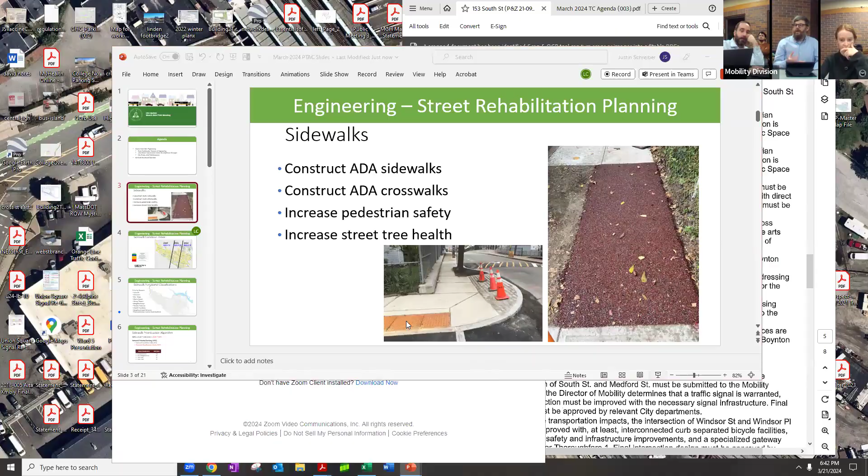We take those two components - the sidewalk condition index and the sidewalk classification priority - on the next slide.

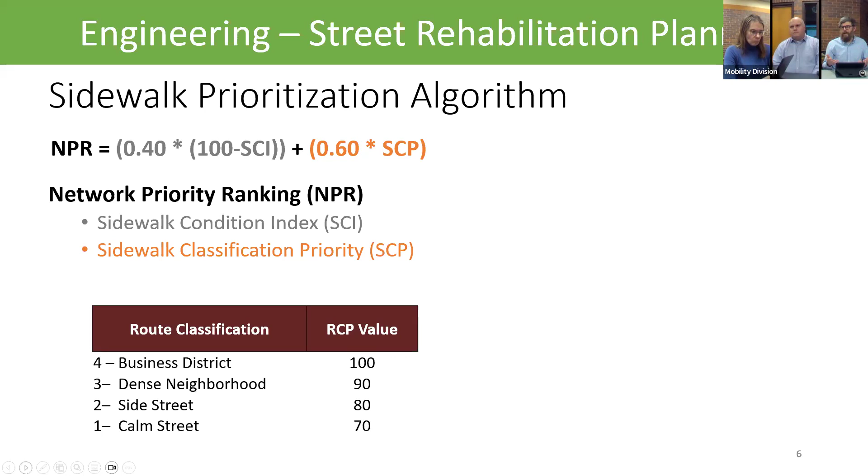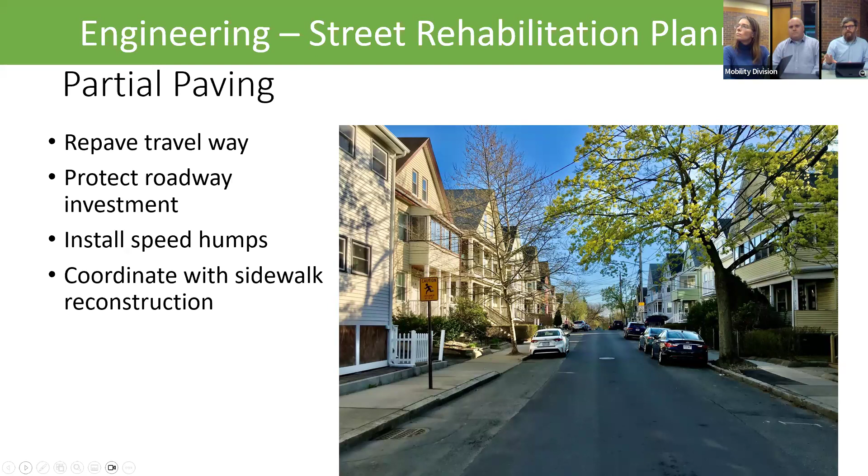We do the same thing on the next slide for partial paving, which is just paving the center roadway lane. For this one, we only worry about the condition of the pavement. The goal here is really to preserve the asset. So we do a similar analysis, much quicker, because it's just the condition index.

So now we have 3 different pieces that we're looking at, 3 really important aspects of our system. Each of them has a 5-year component, and we pull those together into construction contracts. One key thing we do is take the construction logistics of those and combine them.

So with partial paving and sidewalks, we're looking at the utility construction going on, both private utility construction and city work. We're trying to coordinate those things so we're not paving a sidewalk or roadway before going out to do utility work, whether it's natural gas, Eversource, or the city.

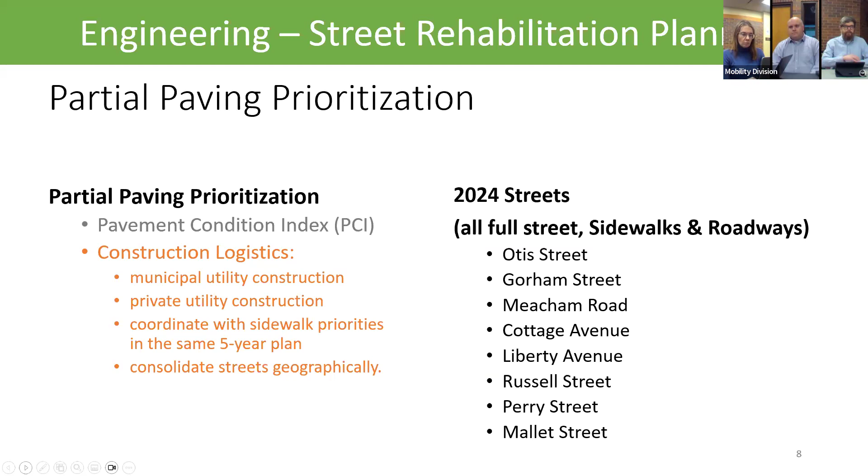Next page. This year, in lieu of doing a complete streets project like a corridor, frankly we have our hands full with a number of projects in design, namely Tufts and West Broadway for upcoming years, but also construction projects we're working on, namely West Washington. So we're boiling it down to something more manageable that fits our workflow better this year, and we're focusing on complete intersections.

We're doing this based on really good success over the past few years targeting intersections with our complete streets work. We know most safety issues occur when traffic intersects, whether vehicular, pedestrian, or transit. When traffic streams intersect, the likelihood of accidents and crashes increases, and those are areas where we've had really good success targeting infrastructure improvements. It's not the only thing we do, and not the most important thing we do, but it has been very successful. So we felt this year would be good to focus predominantly on them.

So now I'm going to jump - we could go through the individual ones, and actually, why don't I give a moment? I've been speaking really quickly. Let me give a moment for questions if anyone has any.

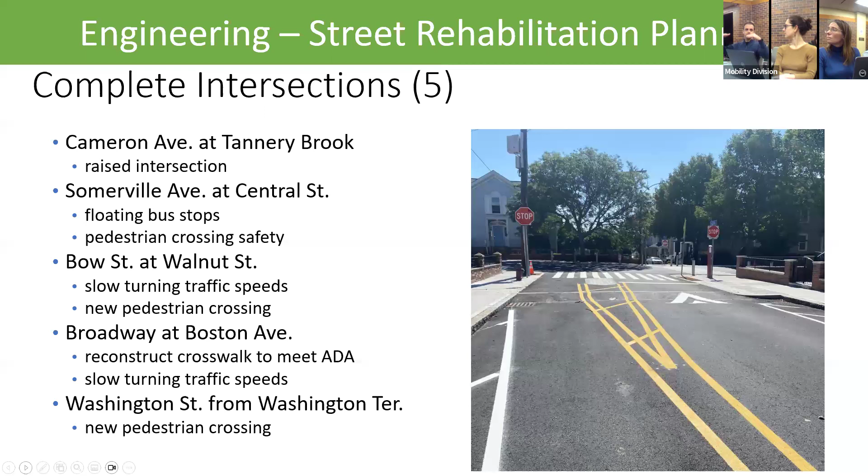Exciting. Do we have a goal — you showed the map with many of the colors that you laid out. Is there a minimum that we would like the city to be? Is it all green? Is it all blue? Is there a minimum? And if there is a minimum, is there a time scale that we can achieve that? How are we thinking about that far ahead?

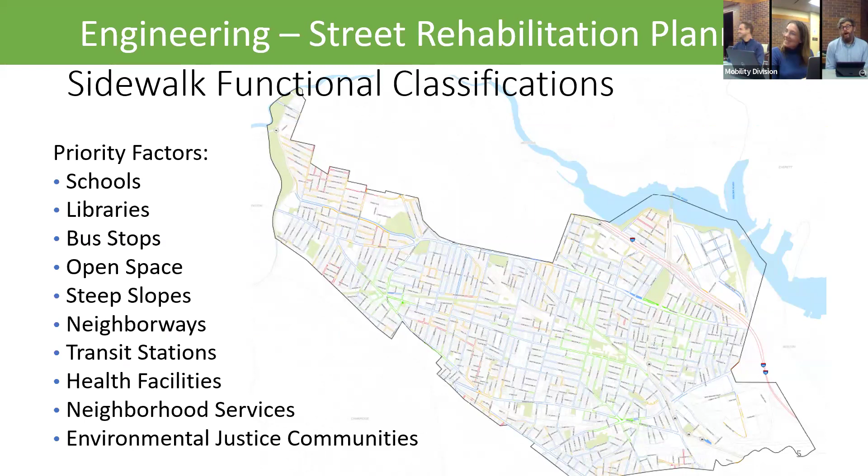That's a deep question. Go back one page earlier — actually, I think you're referring to the condition of the streets. I'm sorry, it was just one page earlier. The next page about the priority location, that shouldn't change every year until geography changes, until our uses change, and we wouldn't want that to all be green, because that would mean our entire city has no difference from one neighborhood to the next.

Ideally, this would all look blue. Yellow, and you can see on the left where we have prescribed activities to it — the blue is the sweet spot. That is something where we're monitoring, we're looking at it. It's not brand new, it's at the longest point of its lifespan. And if it was all blue, that means when things dropped into yellow, we would do spot repairs, and we wouldn't have to do full sidewalk reconstruction. We would just focus on an individual location. So that would be the goal.

The likelihood that we can get to that goal with a reasonable budget in a reasonable time — I just don't see it in our immediate future.

But do we know how many years it would take to get the yellows, oranges, and reds to blue? I don't know how many years. Because I think that number could be interesting for political reasons, just to get fundraising going and try to do more as a city. Yeah, because clearly we have work to do. Yes.

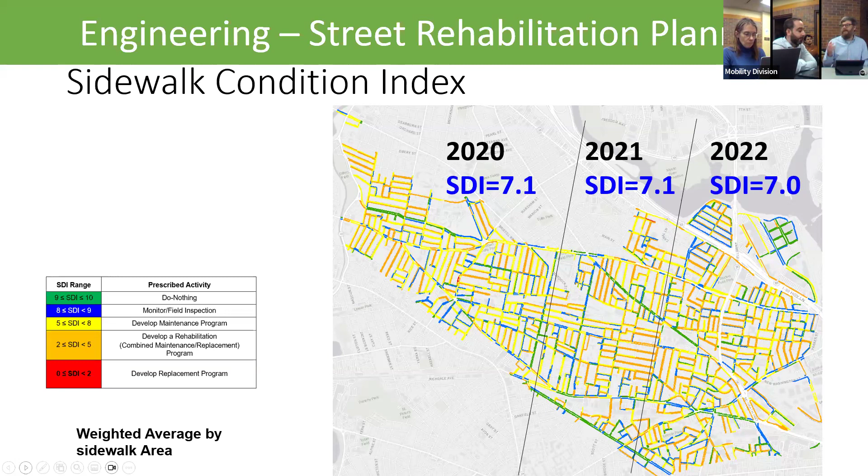Since then, we've addressed 90 of them. We have 13 under contract, either currently in construction or, in the case of West Broadway, currently in design. And then we have 22 other priorities planned for clearly future projects, many of those in the FY25 and FY26 projects we know are coming, with others in larger scale capital improvement plans we also have in the works.

That's why I invited Nikki to join us here. She's helping us with this plan in particular, working in the streets to make sure ADA compliance is maintained during construction, but also helping us move forward the transition plan, because we're right now working on a new plan with Adrian Pomeroy, our ADA coordinator.

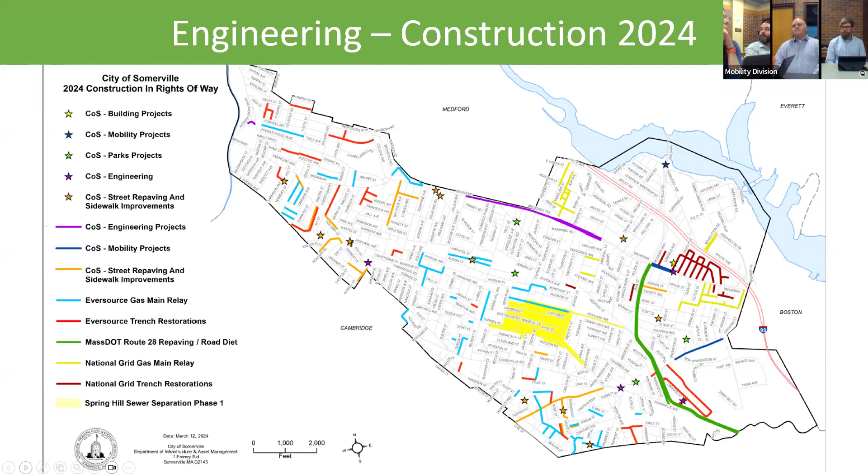So we wanted to take a minute to talk about construction zones and how we prioritize traffic flow around typically private construction projects, but sometimes public construction projects as well.

Again, very similar to our rehabilitation planning, the first thing we're looking at is pedestrians, so in this case, sidewalks. We're making sure the construction plan meets ADA and MAAB requirements. We're also trying to minimize pedestrians crossing major roadways, so keeping the pedestrian path on the same side of the roadway.

We tend to prefer scaffolding or bypasses over detours that take you to the other side of the road or to another road altogether.

We also focus on consistency. From a purely construction standpoint, they have different things going on every day, and it would make sense for them to have something different every day to meet that, but they usually can't meet the quality we're expecting if they're changing it all the time. It's also very confusing for pedestrians because most pedestrians are going down the same corridors every day, so we want to keep some consistency.

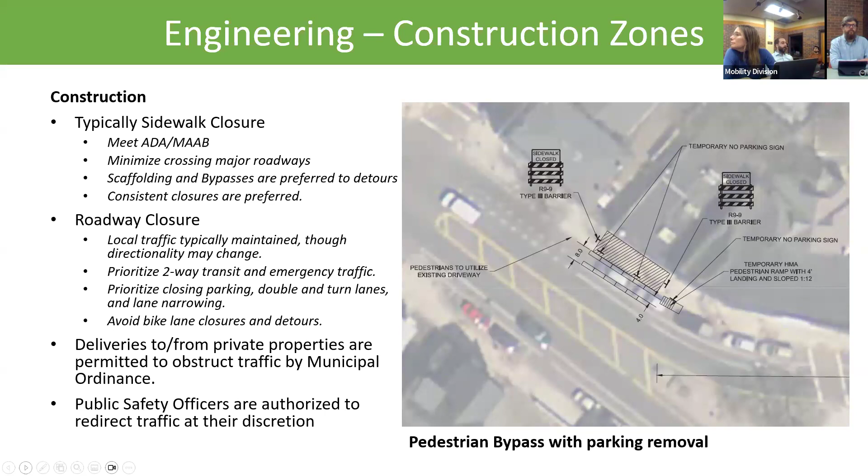Next page. This is an example of where we did both. Beacon Street is on the bottom, and Ivaloo is the side street.

What we did here is we created a pedestrian bypass in the bike lane. We did close down the parking lane, but because of the design of the street, we couldn't use that parking lane for pedestrians, so we used the bicycle lane instead. On Ivaloo, a small street, it was reasonable to direct pedestrian traffic to the other side of the street, which had the added benefit that all deliveries and construction access came off of Ivaloo Street, meaning construction access wasn't crossing sidewalk traffic, since that sidewalk was already closed. That's an example of using different tools to different effects.

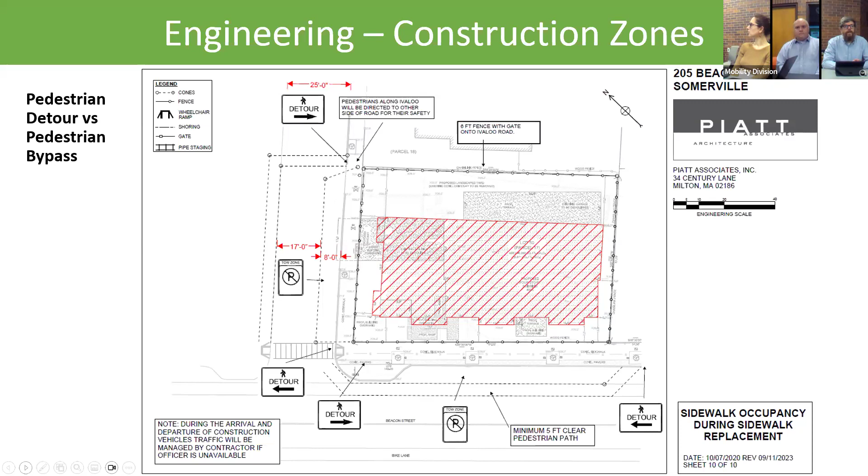This is an example from down on East Broadway, where the contractor had a huge crane they had to put out. I think they even used this plan after the crane was gone because it worked really well. They used scaffolding and their own property to create a bypass around the sidewalk. The sidewalk wasn't necessarily under construction, but they needed to use it as space to do their construction. They did pass through the sidewalk area, but had gates on either side controlling crossing, which provided a safe space on that side of the street.

Crossing what effectively feels like 6 lanes of traffic, even though it's only 2.5, was not appropriate for a major arterial in a large business district. So these are the different types of thinking that we go through when we're looking at our traffic management plans.

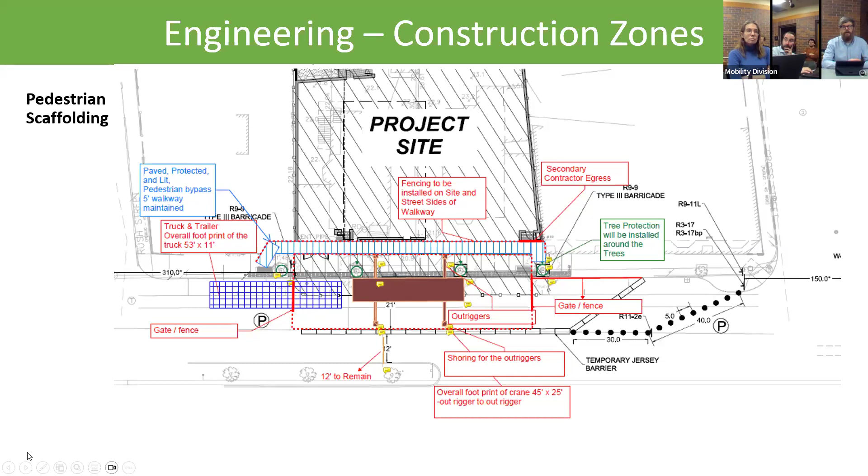This is just an example of how we manage construction detours. Here's an example of large construction that's ongoing today. Between Central and School Street, Eversource is working on a gas project, and over towards Walnut, our Spring Hill project is working on some utility work.

Between those two projects, we couldn't really maintain two-way traffic. We'd already gotten rid of parking lanes and didn't have any bike lanes to work with, so we knew we had to break down and redirect traffic. In this case, we took one direction of traffic and detoured it while maintaining the other direction.

Given the different construction going on here, we're still focusing on consistency. We tried to come up with a plan that would work from the beginning to the end.

The other key point is that by maintaining only one direction of traffic and having detail officers out there, we're able to provide two-way traffic for the 88 and 90 bus that goes down this corridor, which is key for transit access. It would also be really challenging to direct the buses down Medford Street.

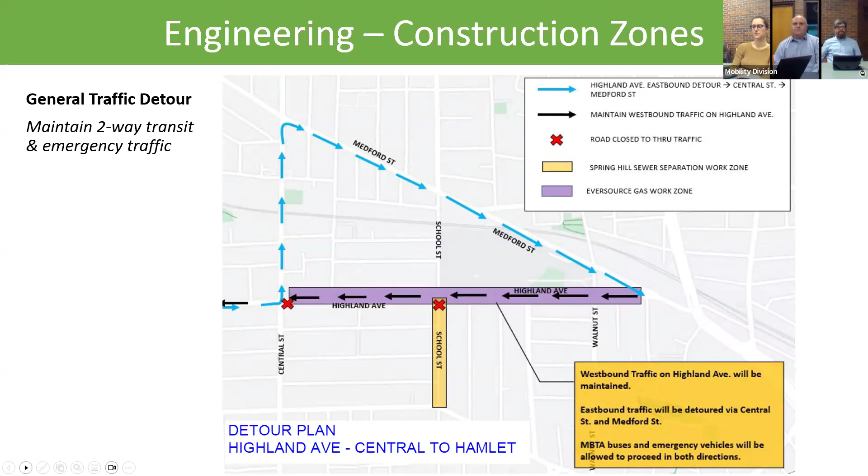Yeah, Alessandra asked us to provide a quick overview. I'm going to skip many of these slides because there's some great background you can read. MassDOT just had a public meeting, there's a link here to their presentation. But I just want to spend most of the time having you guys discuss.

But the big picture is McGrath Boulevard is a reconstruction project from MassDOT. There's a photo on the right, the scope of work in purple, all the way from Broadway in Somerville to 3rd Street in Cambridge. This is not the new pavement you see today on McGrath. This is a much, much larger project to completely reconstruct McGrath. The sort of centerpiece of that is taking down the viaduct over Washington Street and replacing it with an at-grade boulevard.

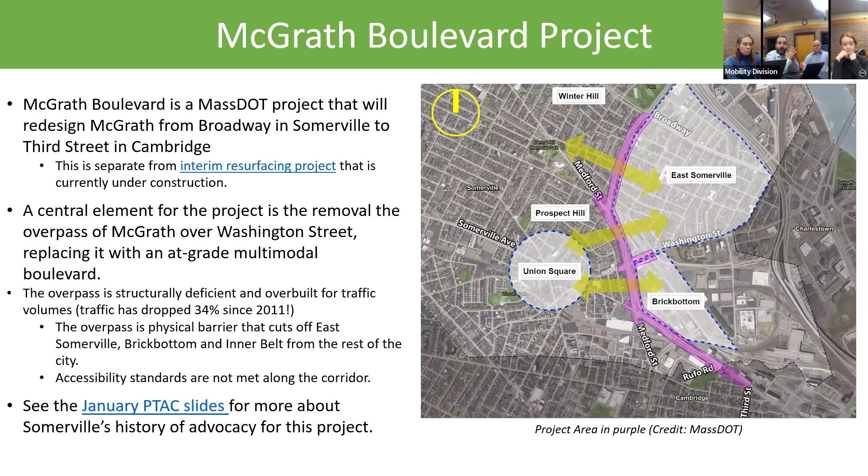Traffic has actually dropped 34% on McGrath since 2011. The overpass is overbuilt, it's ugly. It's a physical barrier that cuts off some of our neighborhoods. And throughout the corridor, accessibility standards are not met. If you click that link on the bottom, we talked a little bit about Somerville's history of advocacy around McGrath. There's a good link to a nice video that was created about that. So it's a state project, but the city's been pushing, and also the community's been pushing for this project for quite a long time.

I'm going to skip the next slide. This is mainly about how it's funded by the Boston Region MPO. Brad Rawson, our director, sits on the MPO. Somerville is an inner core representative on the MPO, and if you click on those links, you can dive into the details around how this project is funded. That's a picture of the viaduct that's coming down on the right.

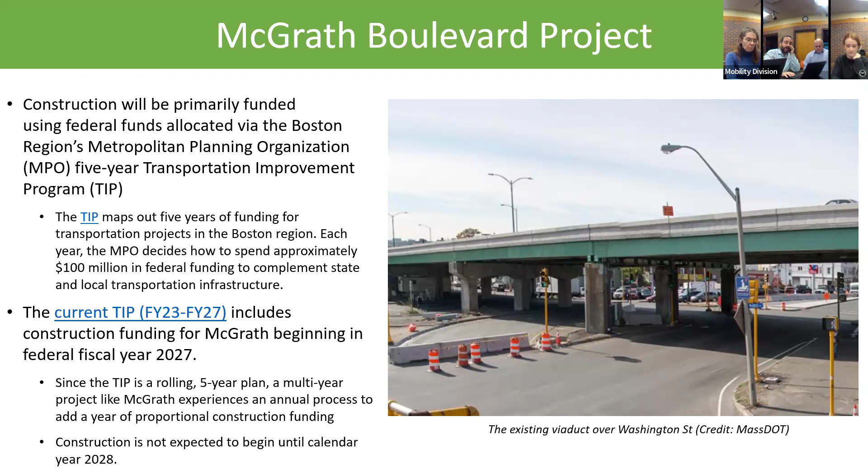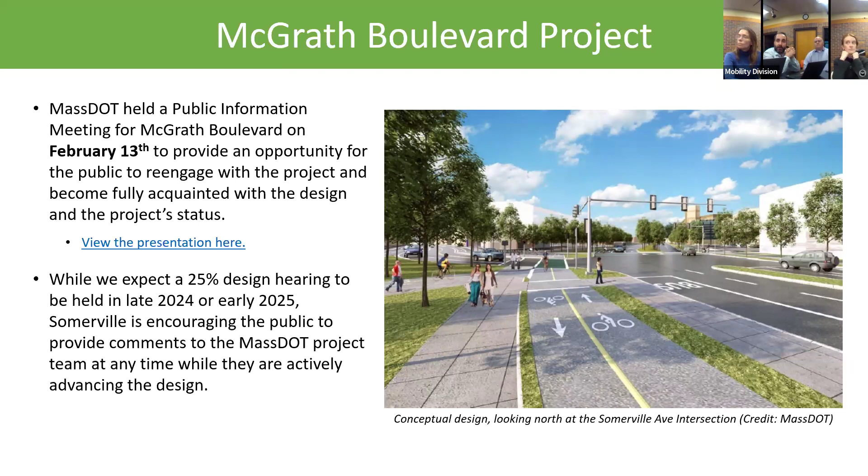So MassDOT held a public information meeting back in February to sort of re-engage the public on this project. I've got a link there to the full presentation. They will hold a 25% design hearing either late this year or early next year. That's sort of a required step in MassDOT's process. However, we're encouraging folks to provide comments at any time. They're not at 25%, but they're actively advancing the design.

Just a couple bullets from the meeting a couple weeks ago that you guys may want to discuss a little more in a few minutes. They would remove one travel lane in each direction, so 2 through lanes instead of 3 in each direction. That's positive, there's less asphalt than the last concept they published a couple of years ago, which is great. It's also consistent with the quick build project that's happening right now, which took a lane out in each direction. They've got curb separated bike lanes, I believe it's sidewalk level throughout the corridor. There's some right-of-way constraints, so if you dive into the plan, you'll see it's 2-way on one side in certain areas and 1 on each side in other areas.

They're proposing a new crosswalk, McGrath Cross Street and Greenville on the other side, connecting East Somerville to Prospect Hill. It's actually kind of a big deal because there's a big grade change between those streets. So the fact that this crossing was in the concept was great. They're also proposing removing the footbridge over McGrath and replacing it with an at-grade crossing. Something you guys might want to discuss a little more. It's sort of long been in the plans, and there's different pros and cons depending on exactly how they design it, and we don't know exactly how they'll design it today. There are some transit facilities, short sections of bus lane, queue jumps at intersections, floating bus stops where bus service exists today. No sort of new bus service or new bus facilities proposed. And then there's one more link there to the full presentation.